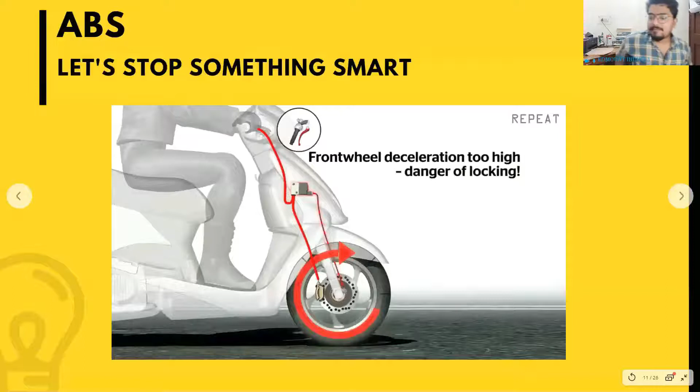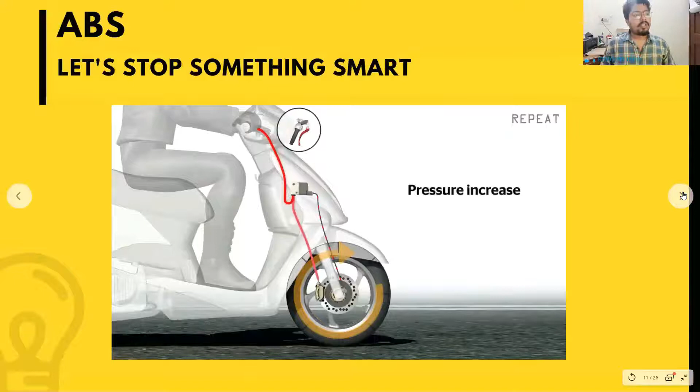So now we will move further, suspension system. So the video is completed. Actually, you can see what is happening, ABS, now brake is applied. Okay Naveen, everything is okay for you? That's great.

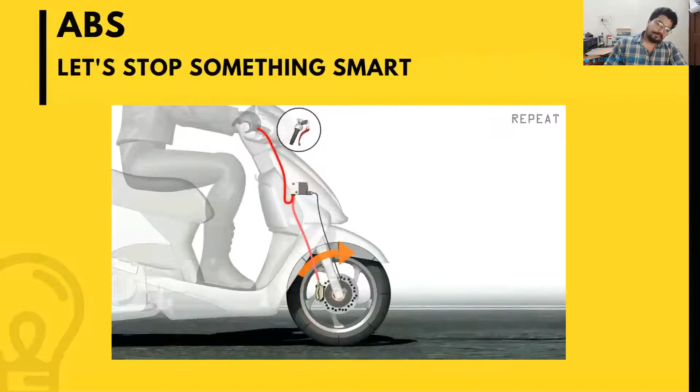For ECU designing, in case of braking system, sometimes ECU is required, sometimes not. Because in case of braking, how everything is maintained is that the sensor gives a command to a microcontroller, and that microcontroller equipped with ECU, your electronic controlling unit, provides guidance to the controlling body, your pump. In case of a car, there is a small pump that gives orders to your fluid flow, opening and closing the valves of oil to maintain the pressure in case of ABS system.

I will explain braking in more detail, about braking calculation, so we will discuss that also. First of all, now we are moving to suspension system, guys.

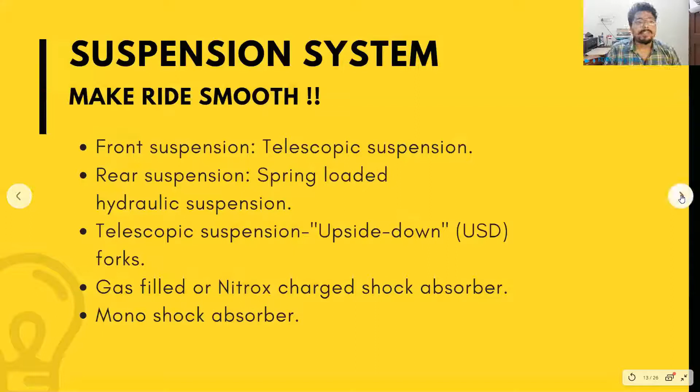In case of suspension system, the first is your telescopic suspension and your USD. You know what telescopic suspension is, guys? This beam bar, this is your telescopic suspension. Why do we call it telescopic suspension? Because it looks like a telescope, 3 to 4 tubes are inserted in a single body, that's why we call it telescopic suspension.

Now, can you tell me what is the difference between both the two images? One is Apache RTR and one is your BMW. It's the shocker. Telescopic suspension is your shocker-only suspension. What is the difference between this USD, your upside down telescopic suspension, and the normal mounting? Why do we use USD, upside down?

Okay, so I will repeat. First of all, the most important thing is your telescopic suspension system, which is a suspension assembly. This is the body which is connected to your lower wheel, and the movement is upside down. In this case, the heavier body is mounted to the wheel and moving up for better shock absorption. In technical terms, do you know sprung mass or unsprung mass? Both images are telescopic suspension, but one is upside down and one is mounted straight. What is unsprung mass and sprung mass?

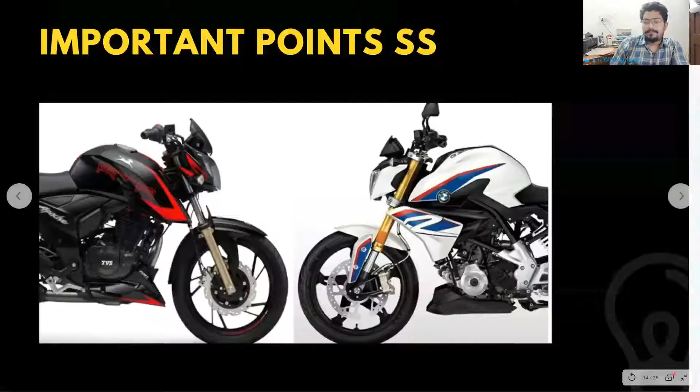Okay guys, so I will just share the whiteboard first. Just I will erase this. Just have a look, I will be explaining sprung mass and unsprung mass. Just have a look.

Okay, so let's say this is a car. This body is a car, and these are the wheels. This is the body of a car, it is visible to everyone, yes. These are the wheels. If the spring is attached like this, this is the spring. S stands for spring.

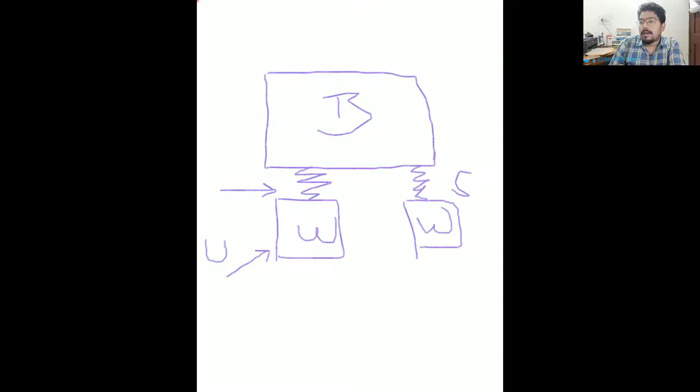If the spring is attached in such a manner, so what is happening, guys? This body is called sprung mass because this body is loaded on the spring. But when you will see the wheel, these wheels are not loaded on the springs, that's why we call it unsprung mass. So here in this example, your wheels are unsprung mass and your body is your sprung mass.

So it's very important to get the idea of what is sprung mass, and this body is sprung mass. Now the doubt is clear, guys? There was a doubt. Yeah, now the doubt is clear. In this case, you can see the body is sprung because it is loaded on the spring, and the wheels are not loaded on the spring.

So in the case of a bike, you have to make sure, and why we are doing it, guys, we will talk about this in brake designing and brake calculation. Yes, in USD we reduce unsprung mass so that the braking effect is less.

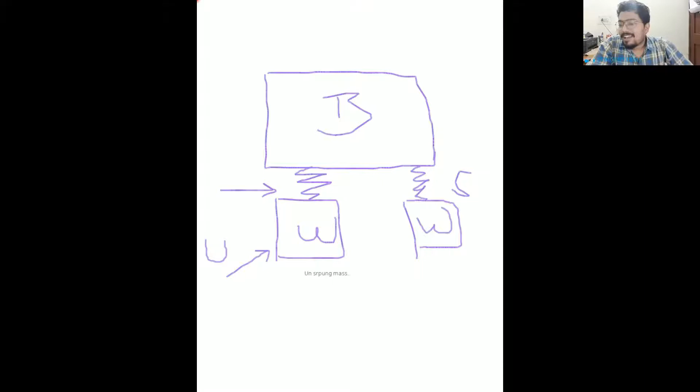Okay guys, one more important question. What will happen when we reduce unsprung mass? Yes guys, why are we talking about this? Lightweight, some people say lightweight, but what will happen? What drastic thing will happen? And better handling, but that is the application or that is the benefit.

But what is physically happening, if we talk about the physics? Why are we reducing mass? Any answer? I am asking this to all my engineers, 12th class students, graduates, people doing jobs. Why are we reducing the mass from the wheel?

Yes, Mohit, you are right, absolutely right. It's inertia. Yes, Shiv also right. Inertia, moment of inertia. Because as we know, inertia is directly proportional to weight, m into r square, m into r square for a wheel. I'm just talking about for a disc.

So moment of inertia. What is inertia? When a body is moving, the opposition due to the mass of the body is moment of inertia. I will tell you this in braking calculations also, how moment of inertia is related to your calculation of braking, dynamic load and distribution.

So guys, it's clear now why we need less unsprung mass. Yes, say yes, so I will move further. Okay, so it's clear now why we need less unsprung mass, because to reduce the moment of inertia, that will help us reduce the dynamic motion, dynamic load.

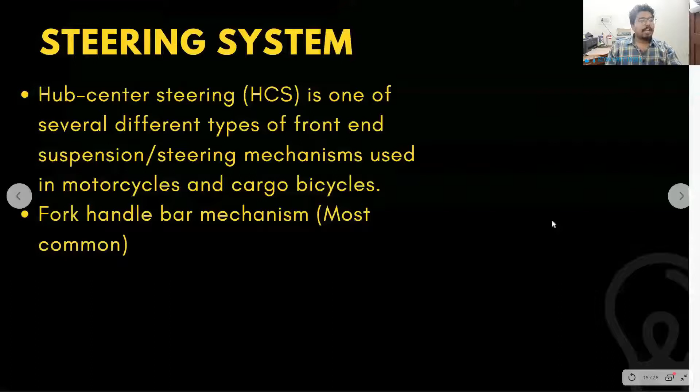This is your hub center steering system, and you will see it very rarely, but it is used in very high speed and very costly bikes. Have a look. This type of steering you might have not seen in many places.

Yes, so Vignesh, we are always there for you. Just have a look, guys, for steering. Look for steering and suspension.

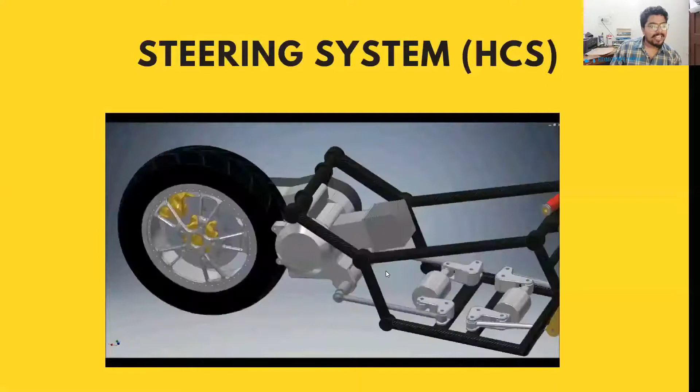So this type, yeah, it's damn good. It's a type of hub center steering system, but it is used in very high expensive bikes. You might have seen this in the Batmobile, Batman movie.

Yeah, just have a look. Video is clear, guys, just say yes. So I will just continue the video. We are on a video.

Just have a look. Okay, Kanav, you are there. So this type we call it hub center steering, HCS, which is used in most of the very expensive bikes. So what is happening?

Yes, Paras, it's an amazing video. And what is happening here? Yeah, what is happening here? Yeah, just wait, Akhil, you will see it. So in this video, what is happening?

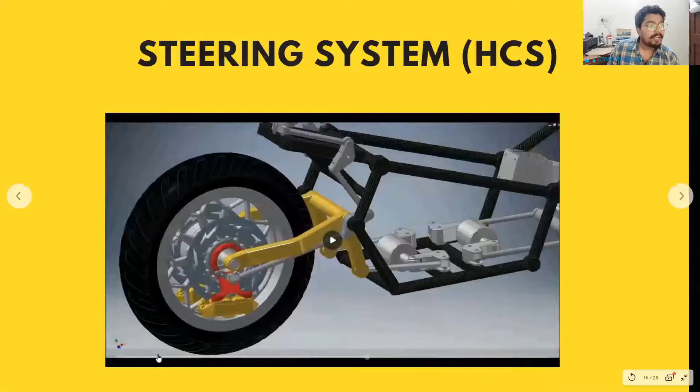What I mean to say is hub center, which is used in highly expensive bikes, because everybody can say, because you might have seen the fork handlebar mechanism. Everybody has seen that? Say yes. If yes, fork handlebar mechanism.

Everybody has seen a fork handle like it has in your bicycle, in your motorbikes. So if we will talk about in steering calculation how to build a very good quality fork handle, we will talk about it. And what bearings, what type of bearings you should use, and what type of house assembly we will use, we will talk about that.

But when you will see a high-speed bike, like if we talk about a bike in Batman, you might have seen a motorcycle rotate very fast. This type of steering system is used in high-speed bikes. Why do we use this? Can anybody tell me why we use this type?

Why? Why HCS? No ball bearing, Dinesh says no ball bearing. I will tell you, we use multiple types. Not steering ratio, again no steering ratio. That is the reason, easy turning.

Yeah, Vinny said a very right answer: high speed cornering. Why we use HCS is when you need stability and high speed cornering at very, very high speed. So it's very important when you are working on a very high speed bike, you should look at this type of steering system also, so you can get an idea.

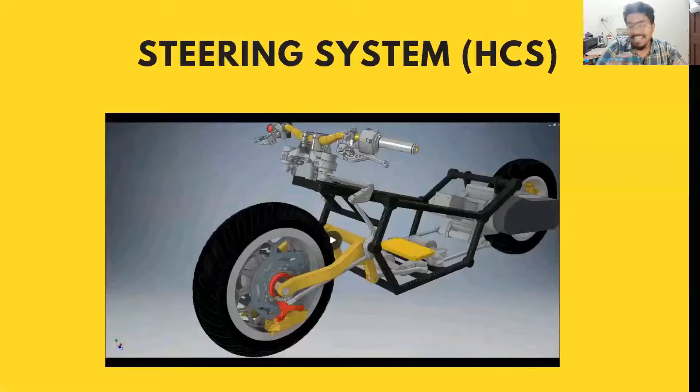But one thing one of our guests said is right, to choose a desired ratio. Yes, it's a little bit right, because we will talk about in suspension, with this type of steering system we get the desired ratios for steering. You can get this with this type of suspension, but these are very expensive, because you can see it's similar to the rear wheel, same as rear wheel, but with a steering system.

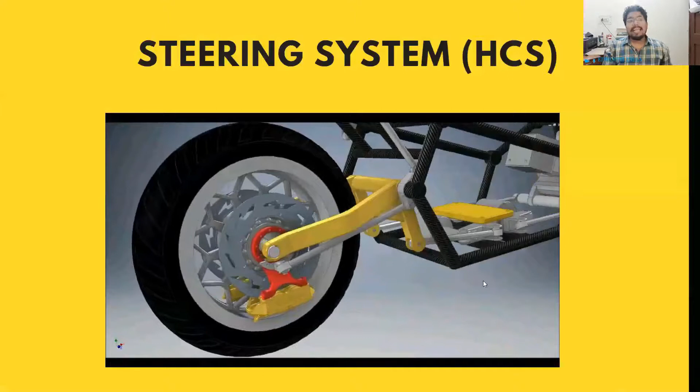So HCS is clear, guys. What is HCS? Yes, just see this, just see this video. Yes, normal fork, yes, absolutely right.

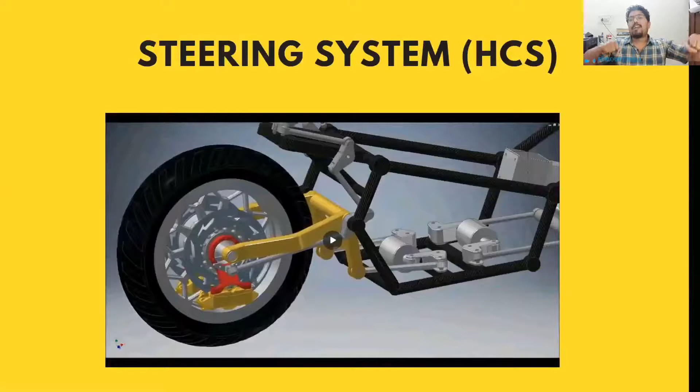I got your point, it's 1:1. Yeah, in normal steering you will see there is a 1:1 ratio, meaning you move the handle and it gets rotated. But for high-speed bikes, you need variable ratios. So we use HCS there.

Same case with suspension, you will see there is a bevel assembly. Here also we use different ratios. So we use this type of suspension steering system. So handlebar mechanism is clear and HCS is clear, guys. Shall we move?

Yes? Guys, clear? Please say yes if it's clear to everyone. Any doubt here, please? Anyone, any doubt, guys?

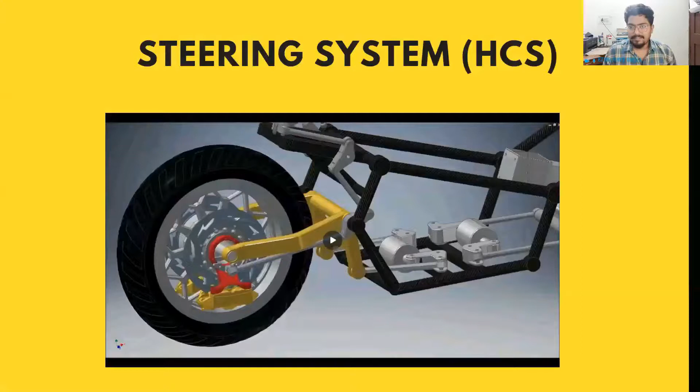Completion of chassis we will do, you will get a task. Tomorrow we will do braking, steering and suspension, and we will try to do motors also.

Okay, so designing parameters: when you have to design, the most important thing you have to keep in mind is your safety, driver comfort and ergonomics. I will repeat, this is safety, driver comfort and ergonomics.

I will explain ergonomics, Salman, just wait a second. Ergonomics is comfort, ergonomics is your comfort. That's why I gave you the example of a Royal Enfield and an Activa. Have you ever tried to take an Activa on a 1200 kilometer ride?

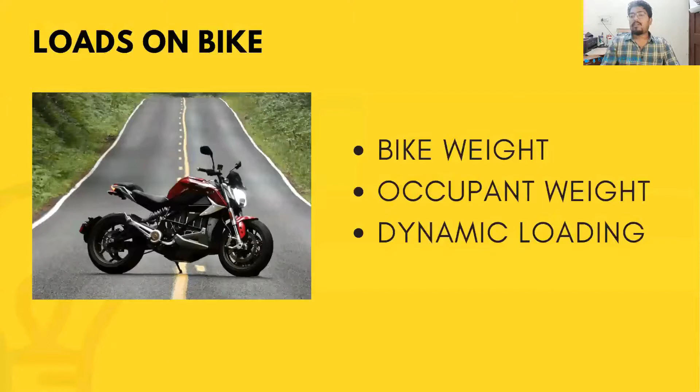What will happen? You will not go flying off your bike like this. In case of a racing bike, they cannot do land cruising. Why can't a cruise bike be a race bike? Due to the aerodynamics of a bike.

So it's very important, for safety, to be very careful about what type of sitting position is used. Have you guys seen the Bajaj Avenger? Yes, absolutely right. Everybody has seen it - you will see the difference in sitting position with the Bajaj Avenger.

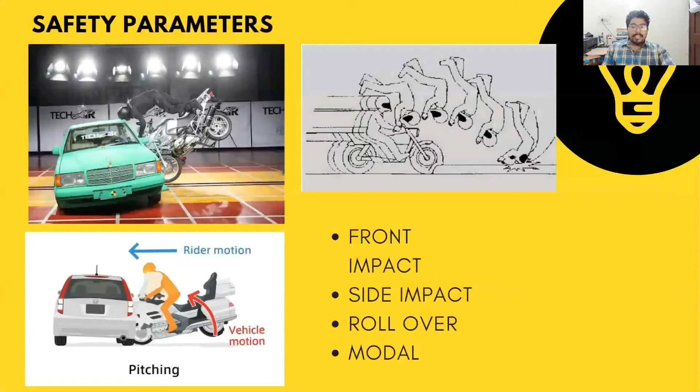Now I will show you the difference between sitting positions using one of our software, and you will see the difference in sitting positions. Because when we talk about the sitting positions of a bike, it decides the safety features and comfort of a bike. If we talk about Avenger, its sitting position is a bit different - I will show you how the sitting position works. So now we will see something on software and get the idea.

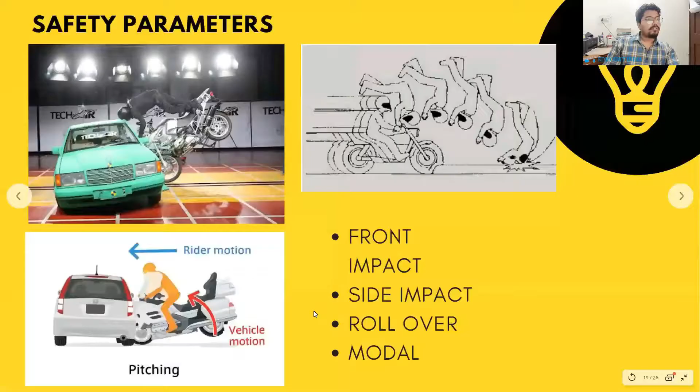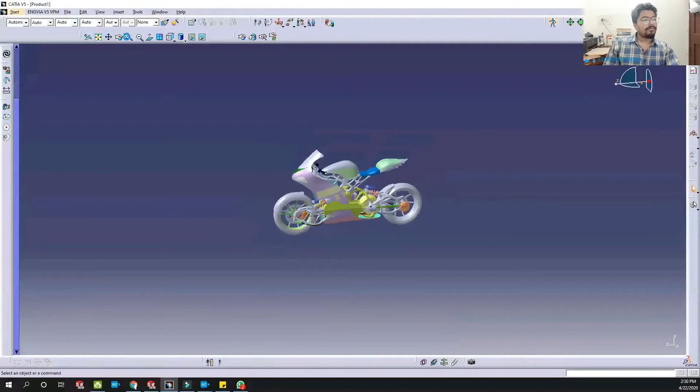This is the software, the window is visible. A bike is there, can everyone see it? Yes, the software window is available - you can see a bike here, that is an electric bike. So if we talk about the sitting position and comfort of a bike...

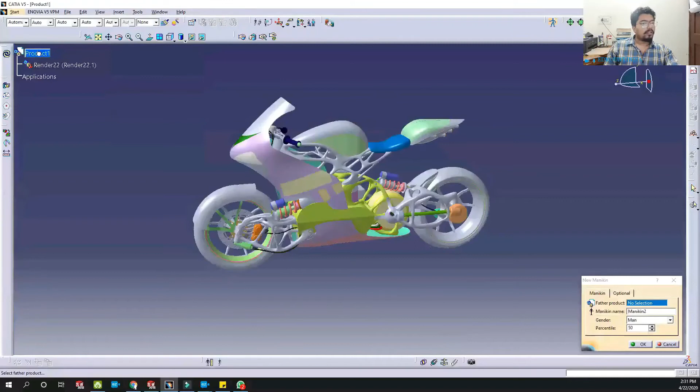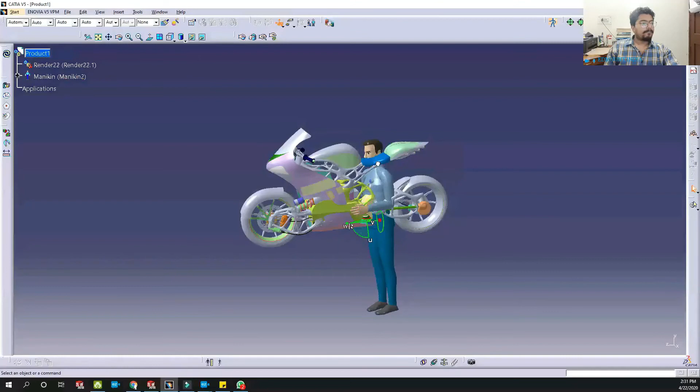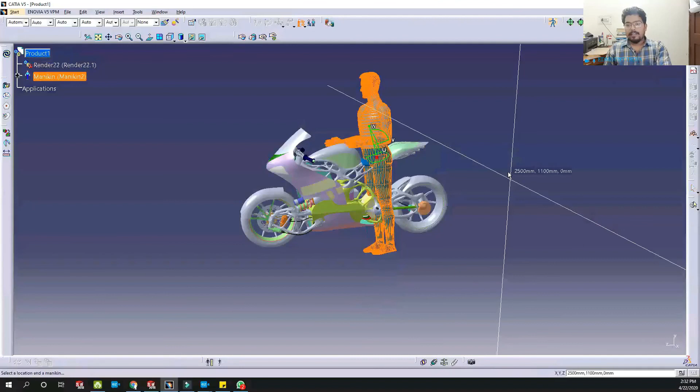I will just insert a manikin - I'll tell you the process also. This is the software we use, CATIA. So this is just for explanation, you can do it manually on your bike also. So what I will do is insert one human being. Now you will see a human being is here, and we are trying to make this guy sit on this bike.